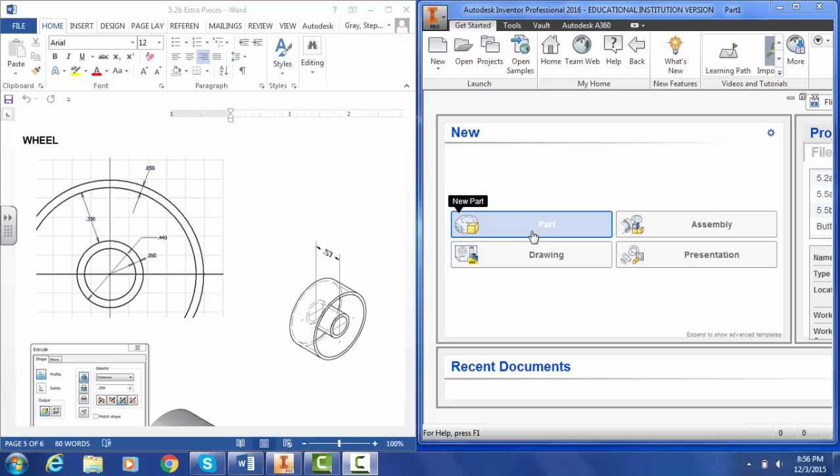In this video, we'll make the wheel to the Automoblox car, a simplified version of the wheel. So in Inventor, we're going to start a new part file. And notice on this wheel, the only diameter of the circle that we know is this inner circle. And we know that that circle has a diameter. It's actually this circle here. It has a diameter of 0.440.

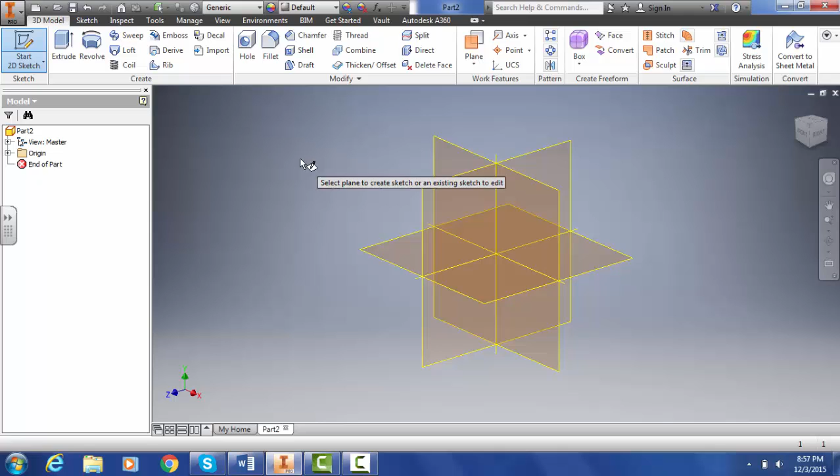So we'll actually make that circle first and then use our offset tool to make all of these other circles, and it will go very quickly. So I've started a new part file, so I want to start a sketch on my XY plane, and I'll choose the circle tool, and I'll start at the origin and make my circle 0.440. And that's my first circle.

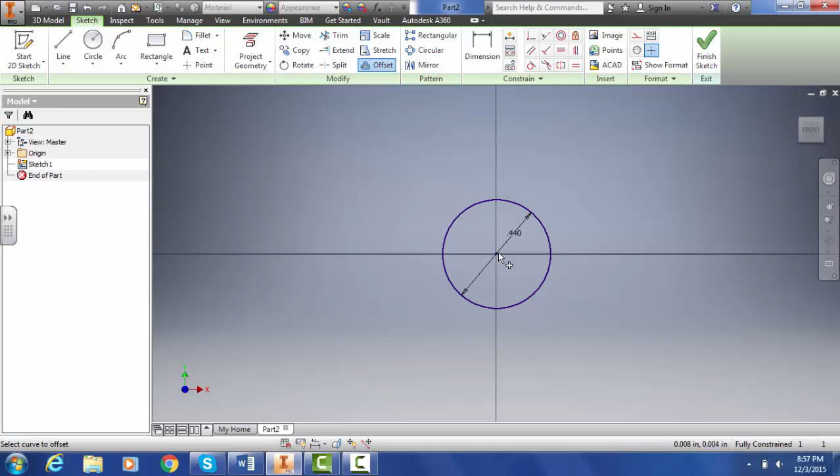That's this circle here. So now I need to make this inside circle, and that circle is offset 0.05. So I'll use my offset tool and I'll offset this circle 0.05. And that's my inside circle. Now I'm ready to make my outside two circles, and I know that this one is offset from this one 0.35, and then we'll offset the last one 0.05.

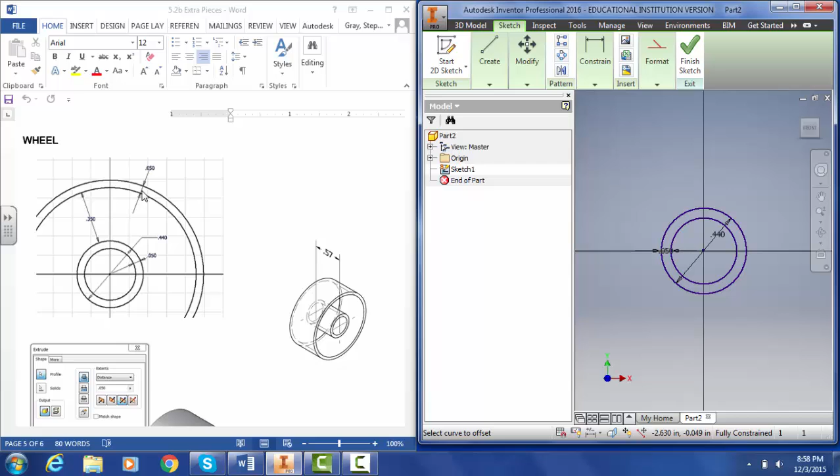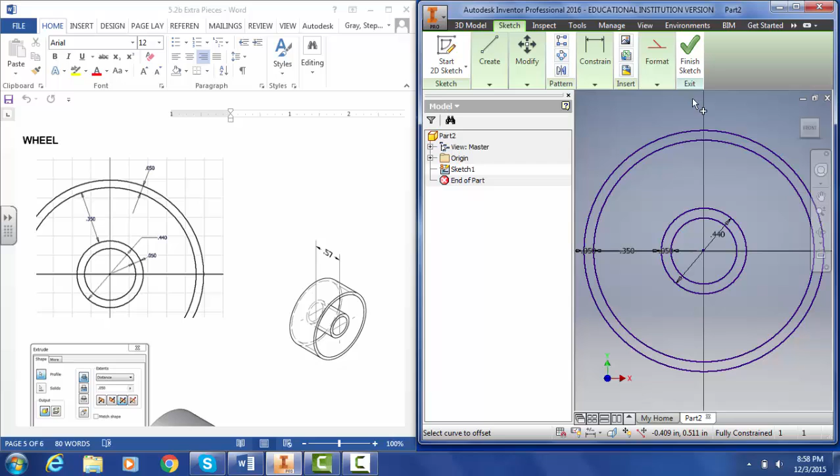So I need to again use my offset tool. I'm going to offset from this one 0.35, and then I'm going to offset again from this one 0.05. Okay, now I have my wheel drawn, and that was very easy to do. So now we need to extrude. Notice we don't want to extrude the inside. We only want to extrude the rim and where the axle would go. So that's the biggest thing that we have to be careful of here.

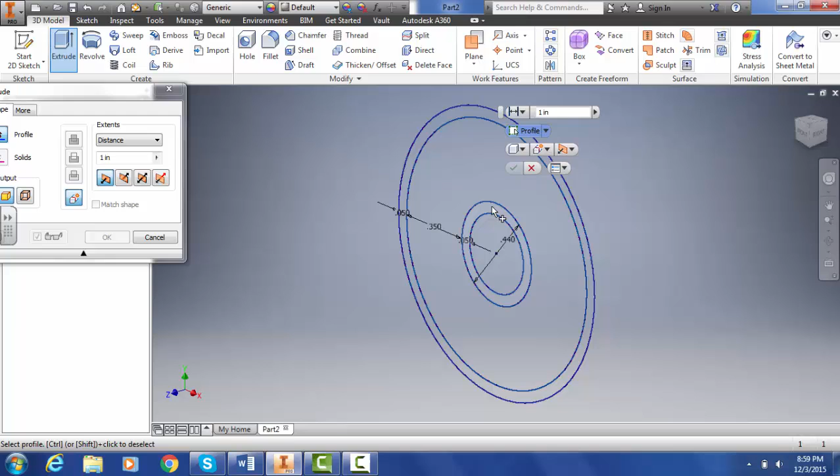So go ahead and click Finish Sketch. And when you extrude, just be very careful about what you highlight. It's really hard to tell, but as I'm mousing over this, it's kind of changing colors there. I only want to extrude this part here. So I'm going to extrude that. And I probably should actually do this one first so we can see better. So I actually want to extrude this one, and I want to extrude this one.

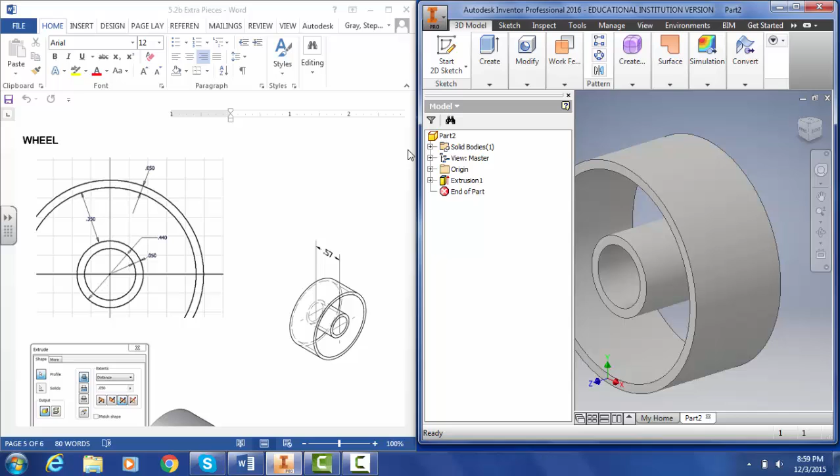So both of those rings need to get extruded, and they need to get extruded 0.57. So we'll change this distance to 0.57. So that's the basic shape of my wheel. The next thing I need to create is this part here, and I will be extruding that 0.05, and then I'll create this circular pattern that will actually put holes in that to make it look more like a hubcap. Okay, so let's create this part next.

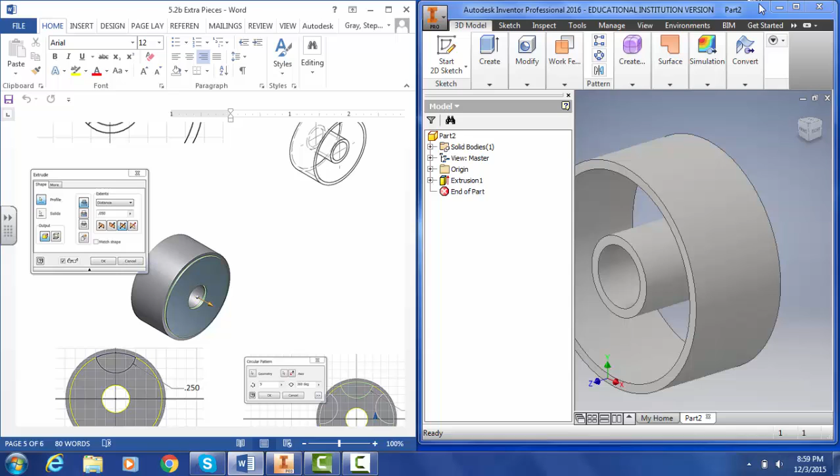So what I want to do is start a 2D sketch right on this surface, and we actually want to project our geometry, and we want to project this geometry also. So remember, when we project geometry, that's just creating that same drawing that we already did onto that surface. So I'll go ahead and click Finish Sketch, and this time what I want to extrude is actually the inside parts, and we're going to extrude that 0.05.

So I'll hit Extrude, but instead of choosing the outer rim, I'm actually going to choose this inner rim, and I also want to choose this one. That's the outer rim of that inside circle. I don't want to extrude it that far. I only want to extrude it 0.05. And that has created this part right here.

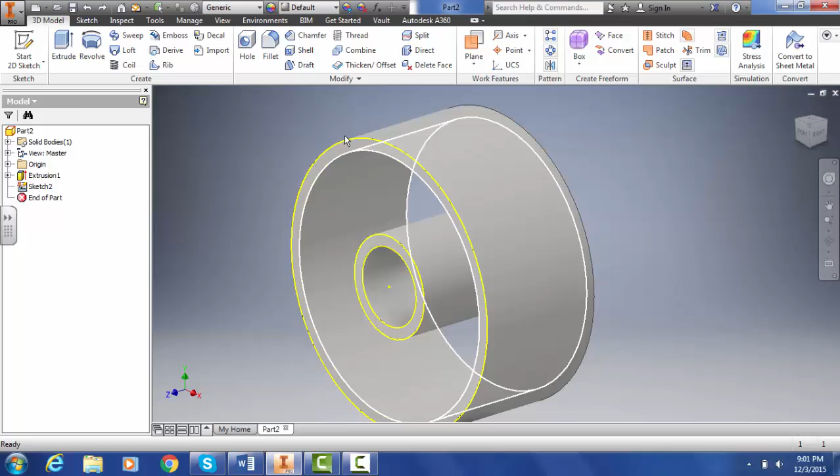I'm going to run through that one more time just so you can see what I did. When you choose what you want to extrude on this one, we're not going to choose the outer rim. We're choosing this inner rim, and then we're choosing that one. So that will extrude both of those 0.05.

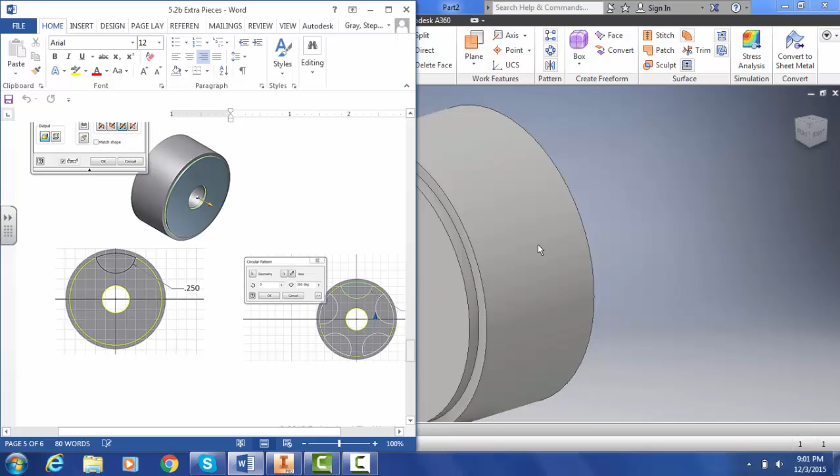Okay, now the last thing that we have to do is create the circles right here, these half circles, and those have a radius of 0.25, which means their diameter is actually going to be 0.50. So I'll create those next. So I'm going to start a 2D sketch right on this surface, and what I want to do is create a circle. Now when I create this circle, I want to make sure that I'm right on the line, and I'll create a circle of 0.50 because the radius is 0.25, but the diameter would be double that, which is 0.5.

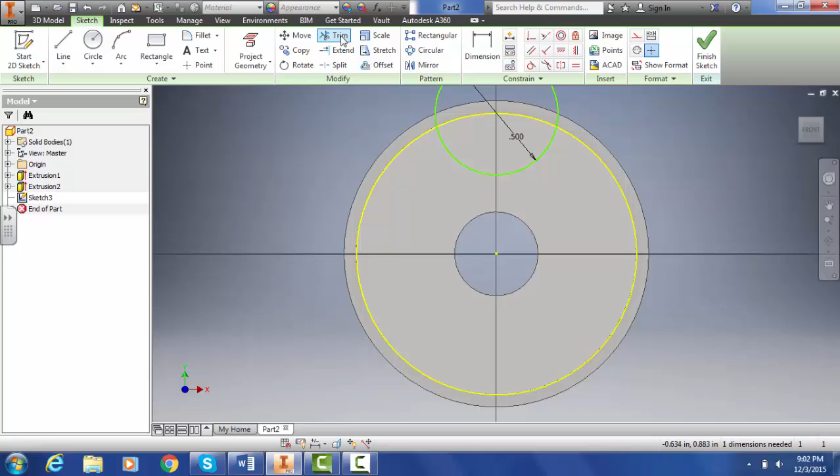Now obviously I don't want that whole circle, I only want from here to here, and the way I can get rid of this other part is to use a tool called trim. So I'm going to use the trim tool, and then I'll just click the part that I want to get rid of, and so it's gotten rid of that top part for me.

Now very rarely do I extrude before I finish the sketch, but I'm going to do that when I want to copy the same piece, because that piece is going to get copied 4 more times. So you'll want to extrude before you finish the sketch, because we're going to copy both the extrusion and the drawing. So I haven't clicked finish sketch, notice over here.

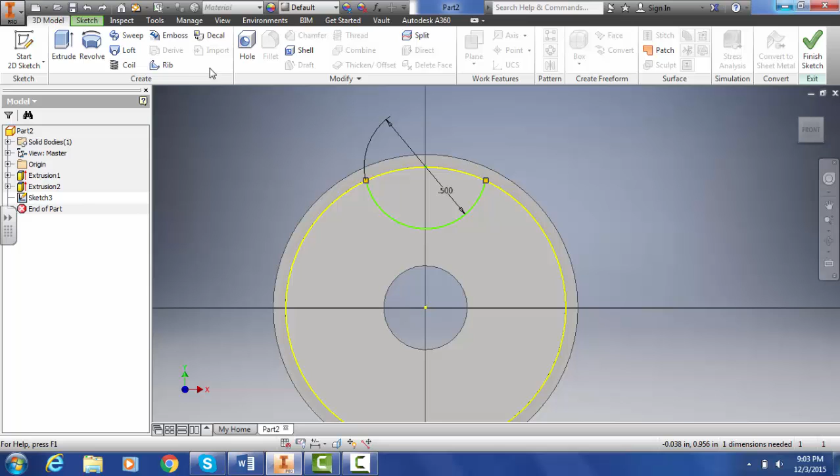I went ahead and clicked 3D model, clicked extrude, and I want to extrude what I just did, but I want to make it a hole, so I'm going to extrude it in, and I'm going to go ahead and say through all, so I make sure it really does make a hole, and then I'll hit OK. So we want to copy that hole all the way around.

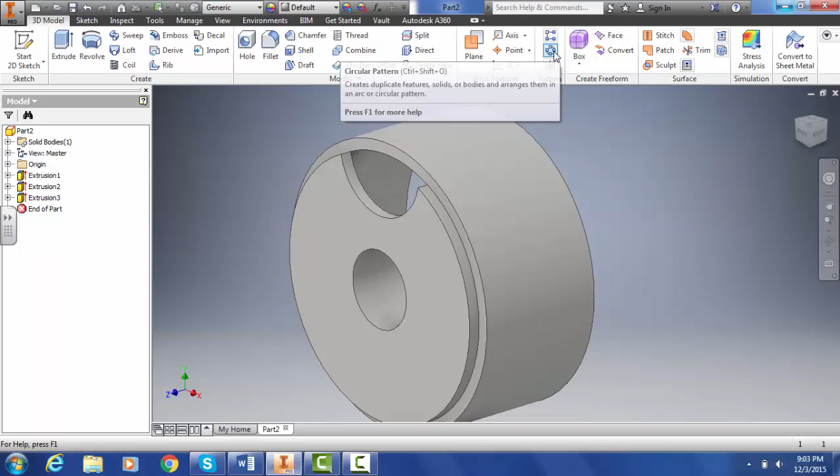So we can use a tool that's called circular pattern, and it's still on this 3D model tab, and it's over here. We used the rectangular pattern when we made the windshield, the little tabs on the windshield. So now we're going to make a circular pattern. So I'm going to click that, and notice that my first arrow that's highlighted is feature. So they want me to choose what feature I want to make a circular pattern of, and it's going to be this half circle. So I'm going to click that.

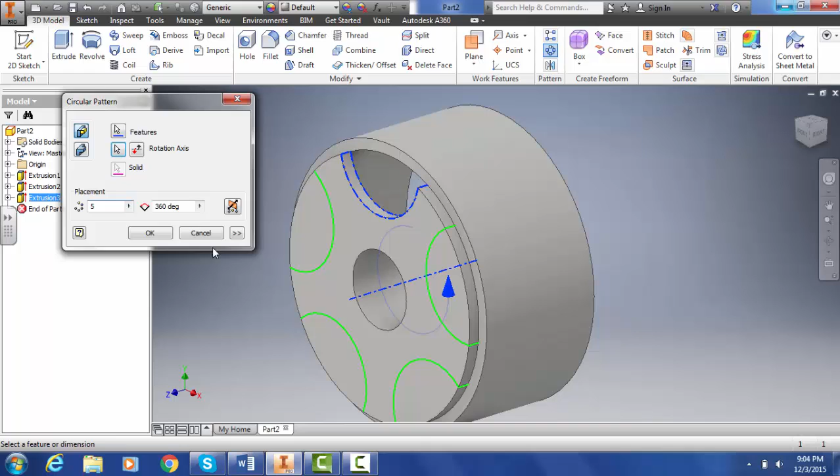The next thing I need to click is the rotation axis. So I want this circle to be rotated around this axis right here. So I'm going to click that, and then next I just tell it how many times to place that circle. So including the one that's already there, it needs to be placed 5 times, which makes 4 other circles. And then I'll hit OK, and it copied both the extrusion and the circle. So now my sketch is finished, and so now my wheel is totally finished.